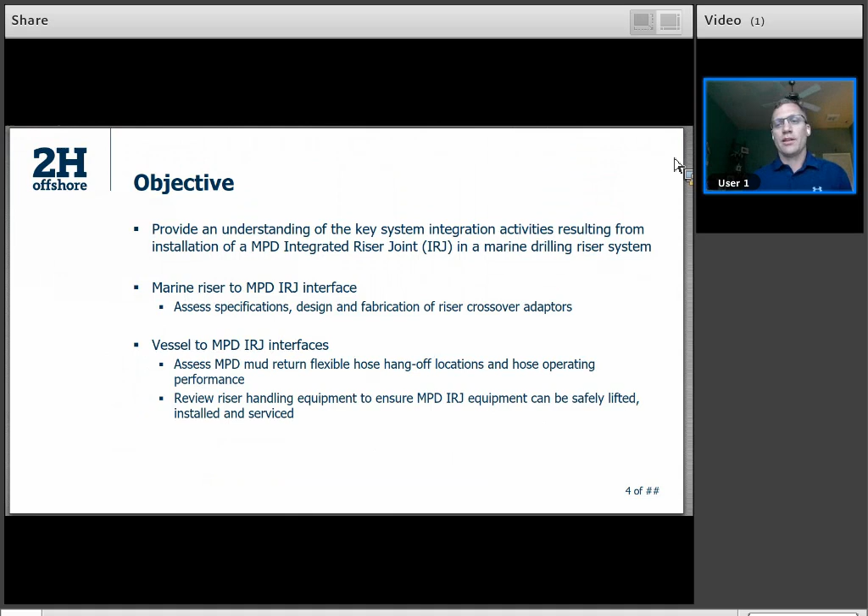Thank you, Victoria, for that warm introduction. I'm excited to be here today to pass on some of the key findings that we've had in MPD riser stack integration over the last few years. With that, we'll get going with the presentation.

We have about 30 minutes today, so MPD is quite a vast topic. We selected this topic today to give everybody a general understanding of the key system integration activities you want to consider when looking at integrating a managed pressure integrated riser joint, or IRJ, into a marine drilling riser system for an offshore drill ship or semi-submersible MODU.

The two key areas we want to focus on today are related to the two interfaces most commonly assessed first when putting an IRJ into a drill rig: the interface between the marine drilling riser itself and the IRJ. We'll go over the specifications, design, and fabrication considerations for developing riser crossover adapters.

The second half of the webinar is going to focus on the vessel to MPD IRJ interfaces. The two key areas we'll focus on there are placement of MPD flexible hoses in the moon pool, and how hose operating performance is affected by that placement.

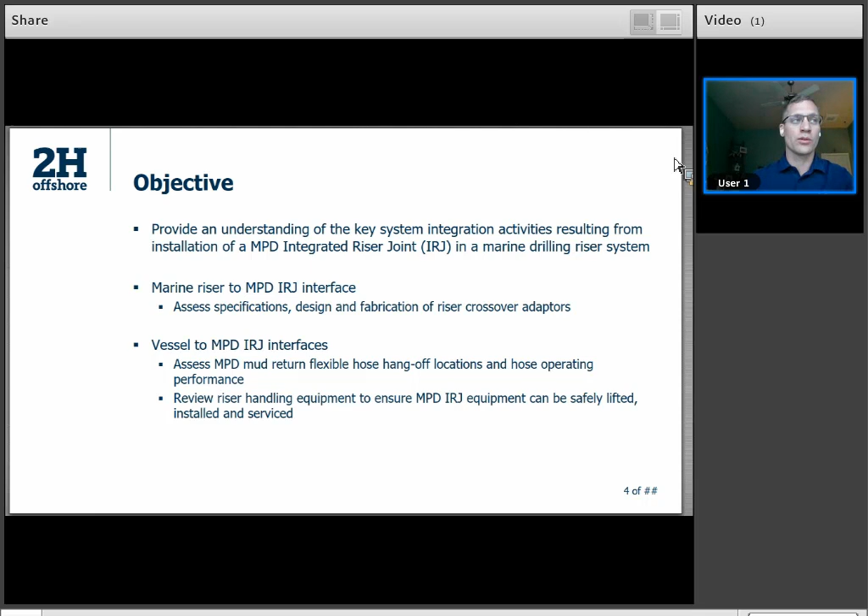We'll also review riser handling equipment, focusing on key areas you need to look into very early on in the project to make sure your IRJ equipment can be safely lifted, installed, and serviced effectively while on critical path during a drilling riser installation or retrieval.

Your typical MPD IRJ configuration, seen in most deepwater drilling activities today, requires a below tension ring managed pressure integrated riser joint placed just below the telescopic joint. It's often placed there because it minimizes the length of the flexible jumpers that have to be hung off the side of the drill rig's moon pool and below the hull all the way down to the IRJ.

We highlight this because for most drill ships and semi-subs, the flexible jumpers for choke and kill lines, the mud booster line, and hydraulic lines don't typically extend that far below the hull. But when you start looking at MPD IRJs, the hoses can extend to quite long lengths.

We've seen installations where you may have a keel joint, a termination joint, or even a pup joint placed below the telescopic joint and the IRJ. The keel joint and termination joint may be based on the rig-specific riser stack-up, but oftentimes drilling contractors look at putting a pup joint between the telescopic joint and the IRJ to get proper spacing, so that when the pup is hung off in the spider, the MPD IRJ is at an acceptable working height for any work platforms in the moon pool.

What these additional joints do is increase the length of your flexible jumpers that extend below the hull. We've seen instances where jumpers have ranged from 220 feet all the way down to 330 feet below the hull. That'll be key when we get to the second half of the presentation, looking at vessel to IRJ interfaces.

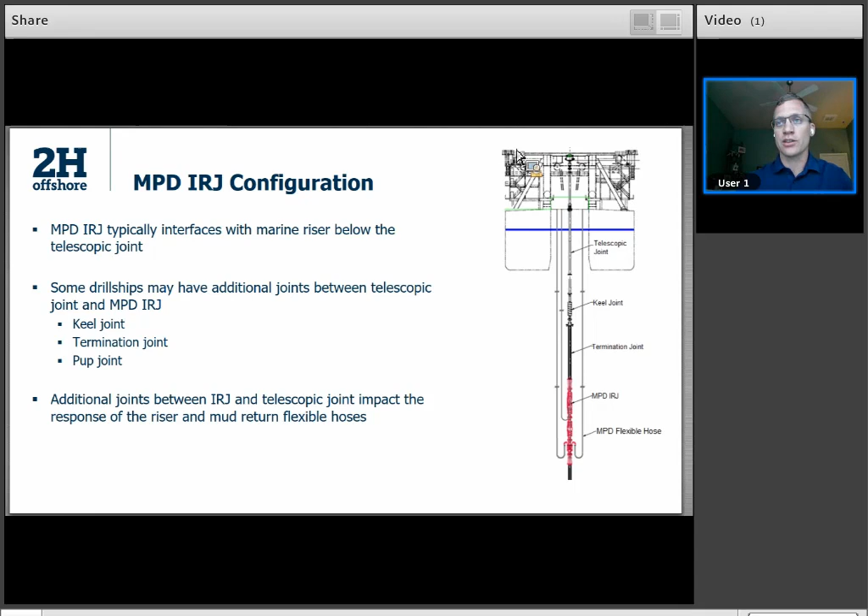So, excuse me, I bumped that a little too fast. The first topic we wanted to talk about was the marine riser interface to the MPD IRJ. One of the most common questions we get is why are marine riser crossover adapters required to put an MPD IRJ into the marine riser system?

They aren't always required, but typically the reason you'll need them is many MPD service providers have a standard set of flanges or interfaces at the very top and lower half of their integrated riser joint. Oftentimes those riser flanges could be API flanges, or custom marine drilling riser flanges specific to that MPD service provider's OEM kit.

What we need to do is have a way to adapt from the rig's existing marine riser flange and crossover to the MPD riser specific flange. So the crossover adapters are just the means to facilitate getting the connection so you can insert the IRJ seamlessly into the riser string, while still allowing the rig's choke and kill lines, mud boost line, and hydraulic auxiliary lines to have a continuous conduit through the MPD IRJ.

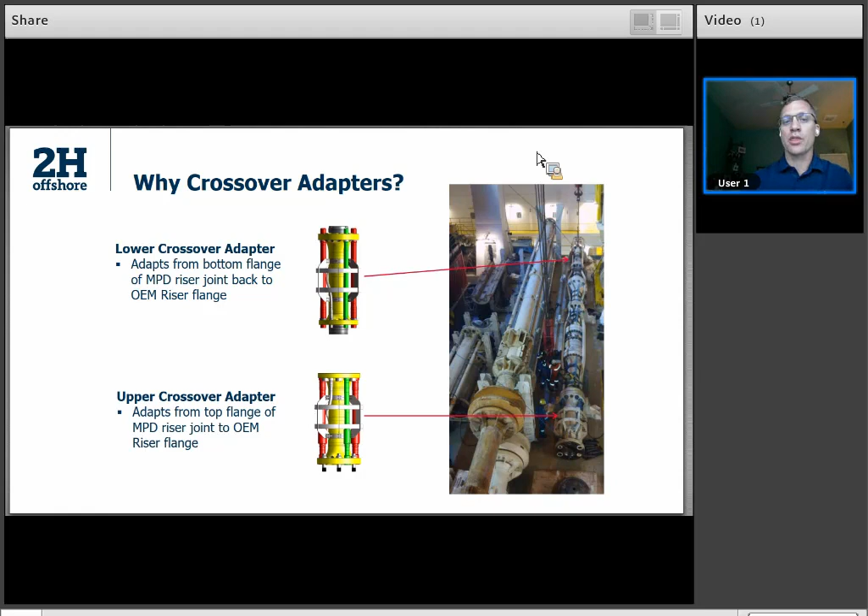The key crossover adapter design considerations you have to weigh: very early on, you're going to want a stakeholder management plan. What we mean by that is you have numerous players involved when you start looking at integrating an MPD riser system into your asset.

You'll typically have the operator, the drilling contractor, riser OEMs, your MPD service provider, and you may have third-party design representatives or even third-party certification authorities like ABS and DNV. Making sure all those parties come together and understand the roles, responsibilities, and requirements, and getting information to adequately design your crossover adapter from the drilling contractor and the riser OEM, is really beneficial in helping make sure you have a smooth execution when designing your crossovers.

Perhaps one of the key challenges to consider early on in your project is what type of riser system do you have? Typically today there are two riser system classifications out there: load sharing versus non-load sharing. On the next slide we'll define what that means. But that distinction can drive whether your crossover adapter design is fairly complex or fairly simple.

One aspect that crossover designs have to consider is managing the geometry changes that come with different orientations of your auxiliary lines. The lines may have different clocking positions between the MPD service provider IRJ and the existing marine riser.

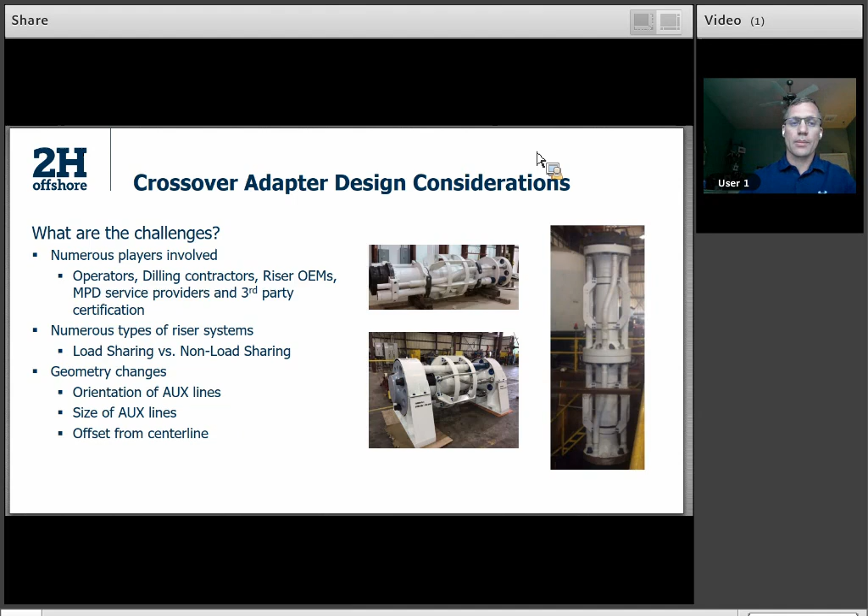Looking at load sharing versus non-load sharing, this can really start to impact the overall load rating of your MPD IRJ. There are two systems out there today. A load sharing system, one of the more common types of riser systems in the market, looks at the load path from the marine drilling riser down to the wellhead - typically with a load sharing riser, you take 70% of the tension load through the main tube, and split 30% of the tension load to the aux lines. That's trying to take benefit of the fact that the choke and kill lines, or the aux lines, are fairly rigid and strong structures, so you can balance the load between the main tube and the aux lines, which helps minimize the overall weight of the riser system.

There are also non-load sharing riser systems on the market where 100% of the load path is taken through the main tube only. The reason you may want a non-load sharing riser system is it creates less complex loading for the aux lines, and you just take the tension through the main tube of that riser.

Now, when we have to adapt the aux lines to deal with an offset difference between the IRJ and the marine drilling riser, the lines have to be bent outwards. As you bend these lines outward, you typically don't want to share load with those auxiliary lines, because anytime you put a bend into the aux line and put it under tension, the bend wants to straighten out. We've seen instances where people tried to take load sharing through bent aux lines in the past, and they met with challenges.

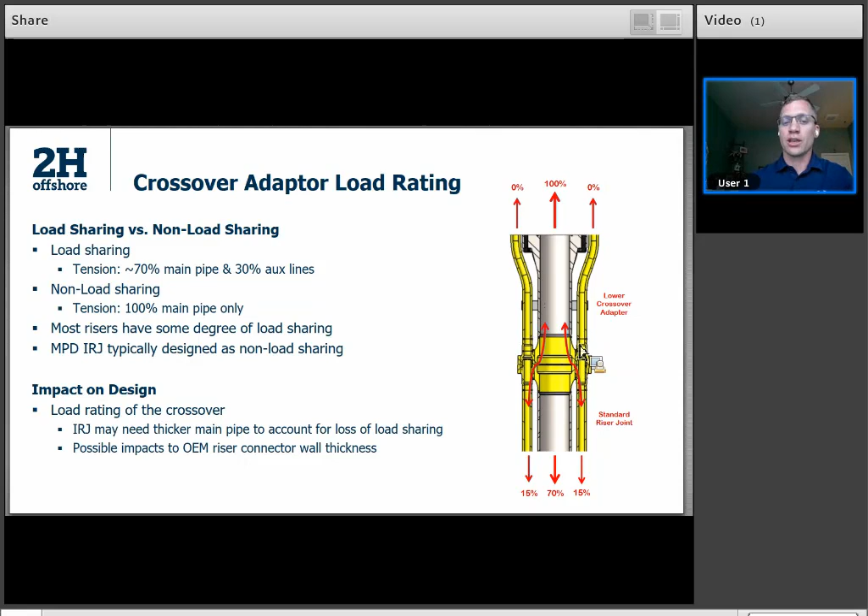So what that may require is getting in touch with the riser OEM to see if you can procure a flange specifically designed to transition from a load sharing to a non-load sharing riser, with that additional weld prep built into the flange. The reason we bring this up is that it could lead to a fairly long lead time.

The next aspect we get a lot of questions on relates to why we can't have a standard riser crossover joint for different riser systems. The reason is really highlighted in the pictures on this slide.

The lower left-hand figure is an MPD service provider specific flange with 5 auxiliary lines, which can be spaced equally around the riser flange in 60-degree clocking increments. For this specific installation, we looked at a MHWirth CLIP style riser connector with 4 aux lines, run 180 degrees on opposite sides of the riser, in parallel. So you can see the crossover adapters have to deal with different clocking positions.

The offsets from center line relative to the bolt circle were different, and the quantity of aux lines was different. So even within common OEM riser flanges, if you look at the figures to the right for a Load King 3.5 riser system, the way we've set these up is that for all these riser flanges, the choke and kill lines are in red, with the red dots oriented north and south. That gives you an idea of where the riser boost line, riser hydraulic lines, and any additional aux lines would be placed.

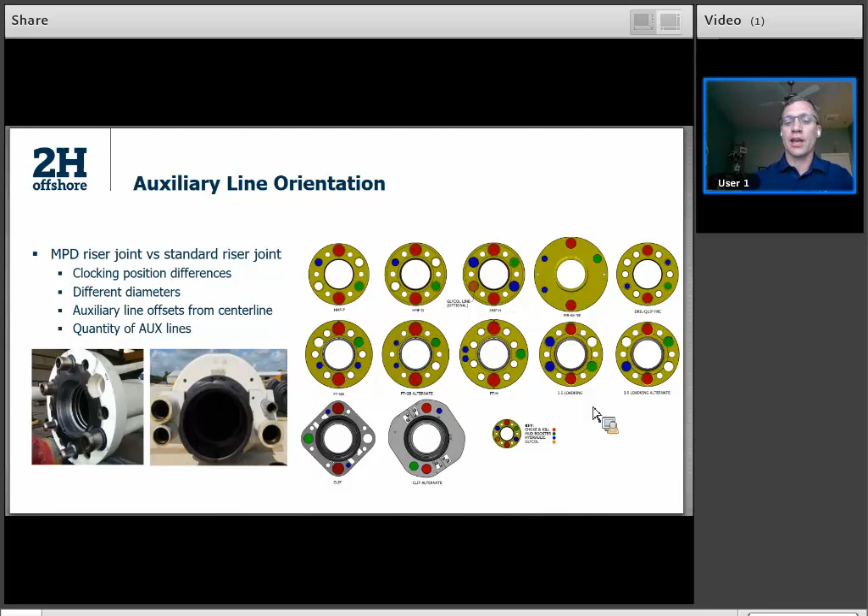So if you have a rig that potentially has that glycol line, you'd want to get conversations going with the MPD service provider fairly early on. That way you can identify the need of any changes you need to make either to the riser system, determine if that glycol line is needed, or possibly look at seeing if it is feasible to integrate that 6th aux line through the IRJ.

Going back to what we talked about with different clocking positions, this was the specific set of crossovers we developed to allow us to interface from that MPD service provider's flange over to a clip riser system. You can see we have the 4 aux lines running in parallel, and we had to bend lines out of plane to adjust for that orientation.

The challenge that creates is you get mild to severe bends when you're trying to clock between 60, even up to 90 to 100 degrees out of plane with aux lines. And what that does is create the perfect conditions for buckling.

The way we try to arrest buckling is we try to minimize the severity of the bends to the greatest degree possible, taking that over a longer length and making the riser adapters longer themselves. But the challenge there is as you add length to the riser crossover adapters, you're adding weight to them, and you may have to procure additional raw materials in order to get that length.

Oftentimes we're going to increase the wall thickness to try to make those lines stiffer, and oftentimes you're going to have to increase the wall thickness anyway, because you're taking such a severe bend that the line will thin out near the bends. A lot of the time you'd think you'd be able to reuse the existing aux line material from the provided donor joint. However, because of the wall thinning from bending, you're likely going to have to procure thicker aux lines in order for those lines to be bent.

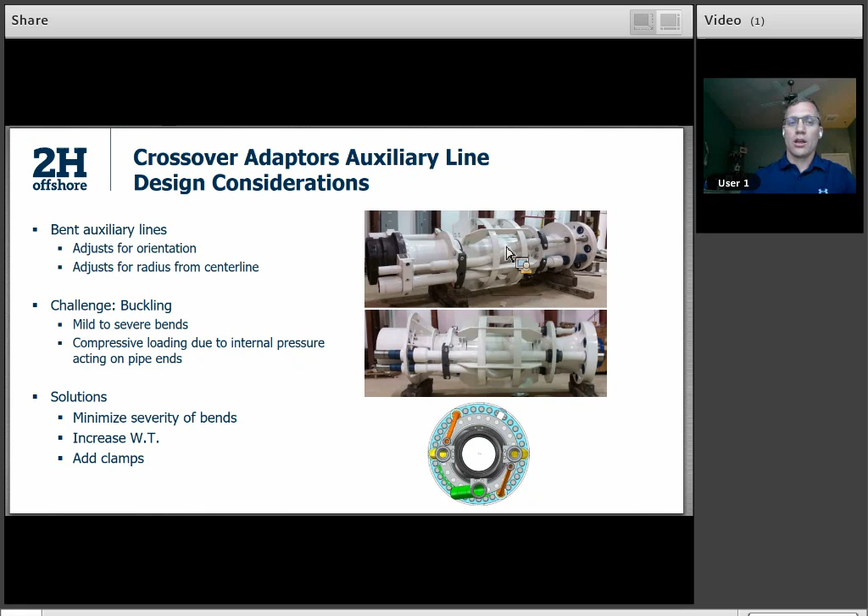Another challenge you can see in dealing with the aux lines is oftentimes you could get to a condition where you may have different internal diameters between the existing riser connector you're interfacing with and the MPD service provider's auxiliary lines. In this example, the hydraulic line had a smaller ID, and we're using this as an example, but for one specific case we had to adapt from a 2-inch ID over to closer to a 4-inch ID on the hydraulic line.

And when you applied an internal pressure of 5,000 psi, that created a load imbalance due to the line size change and the piston area inside the aux lines. So that's going to increase the compressive and torsional loads on those lines, and to some point you have to be able to restrain that.

This can become quite challenging for non-load sharing riser systems, because the riser connector itself isn't designed to take any of the load from the aux lines. So if you're dealing with a non-load sharing riser system, the way to restrain that net axial load is to put that load into a clamp. You wouldn't want to put that load into the OEM riser connector, because that may take it out of its API 16F or ABS and DNV certification rating.

Any additional load you put into the riser connector may require more detailed analysis, or may require you to beef up the riser connector and speak to the riser OEM. So that's just something to be aware of: if you're looking at a non-load sharing riser system, they can be more challenging to manage the aux line bends and pressure load imbalances.

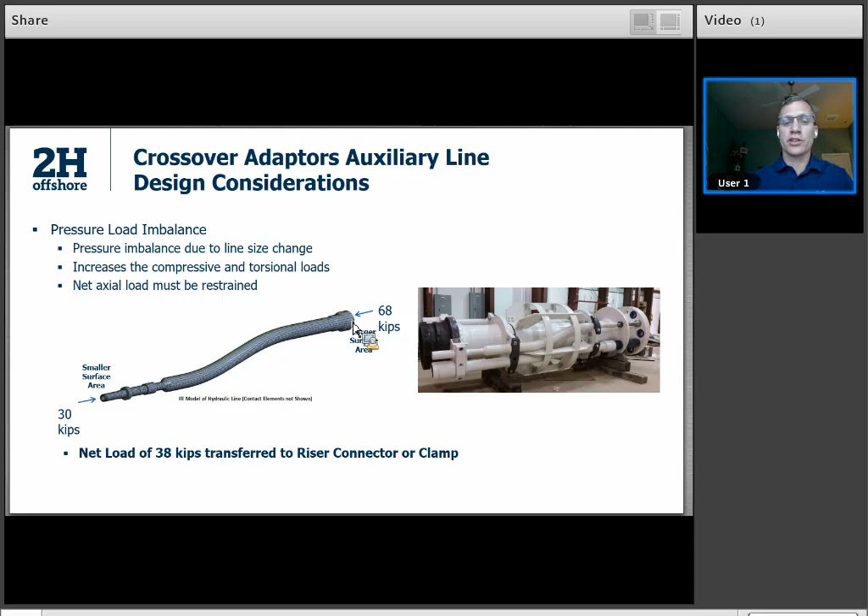There are design features you can incorporate to manage those, but it may increase your overall lead time for those riser connectors. The reason we wanted to highlight crossover adapter design and delivery timeframes is that the crossover adapters themselves are usually the last items ordered over the course of your MPD system integration into the rig. Typically, the design and delivery is on critical path. They're usually not thought of early on when the rig survey is performed to start incorporating the MPD IRJ as well as the rest of the MPD equipment.

What we've seen to date is your design and delivery schedule can range from about 12 to 20 weeks, with a 16-week delivery on average. Flanged riser crossovers are typically load sharing and have less design complexity. When you have a load sharing riser connector, you may have a delivery time of 10 to 12 weeks, depending on if you've looked at that riser system in the past.

From our experience with the crossovers we talked about on the previous slide, the very first set of crossovers that were designed and developed by us for a non-load sharing riser system had an overall total fabrication time turnkey of about 21 weeks. It took 11 weeks to complete design, with some overlap in fabrication of 14 weeks.

As the designs mature and you get more tools in your kit and start working with more types of riser connectors, you have more tools to more rapidly complete your design. And you'd have fabrication drawings that are fairly more complete and don't require as many updates. That can allow us to get a lead time down to, say, 10 weeks for the BHP Invictus MPD riser crossover adapter. That was a Load King riser connector design. It was load sharing, so we didn't have to look at incorporating any clamps.

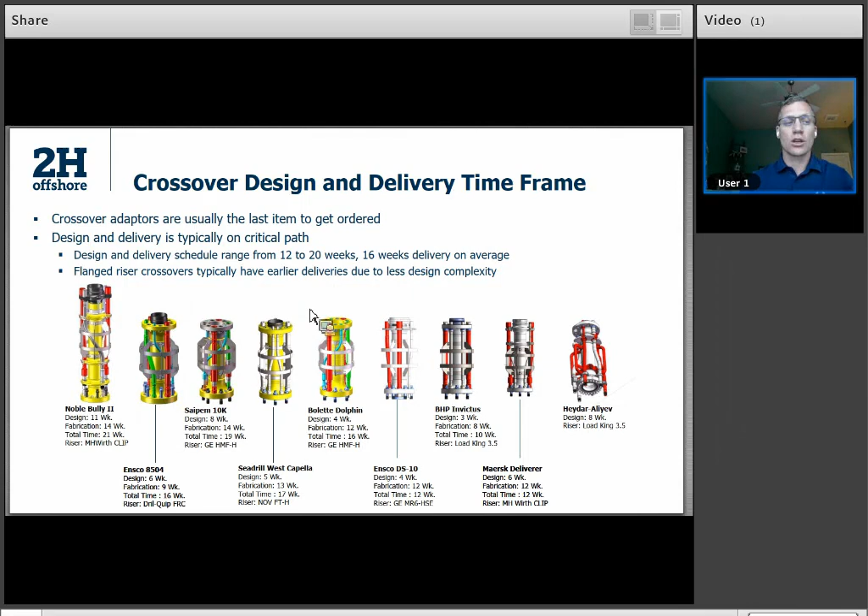We'll continue forward here, and the next half of the presentation is vessel to MPD IRJ interfaces. We're going to be moving away from the crossovers into other areas we commonly work in, and those are related to MPD mud return flexible jumper hose assessments.

Very early on in MPD operations, and even with rig choke and kill, mud boost, and hydraulic lines, there aren't really many analyses out there that tell you what conditions you can safely operate the hoses in to make sure you don't violate the hose minimum bend radius, and to make sure you don't have clashing with the hoses and adjacent structures or the hoses themselves. We want to make sure any hose design limits related to tension capacity and hose twist aren't violated, and we also want to understand how much weather vaning the rig can tolerate with respect to weather heading between the vessel and the marine riser system.

These studies can be performed to establish hose hang-off locations that give you an acceptable operability window to perform MPD operations for the hoses, or we can optimize and look at alternate hose hang-off locations that may give you a wider range of operability conditions you can cover. These hose studies are required for ABS and DNV certification.

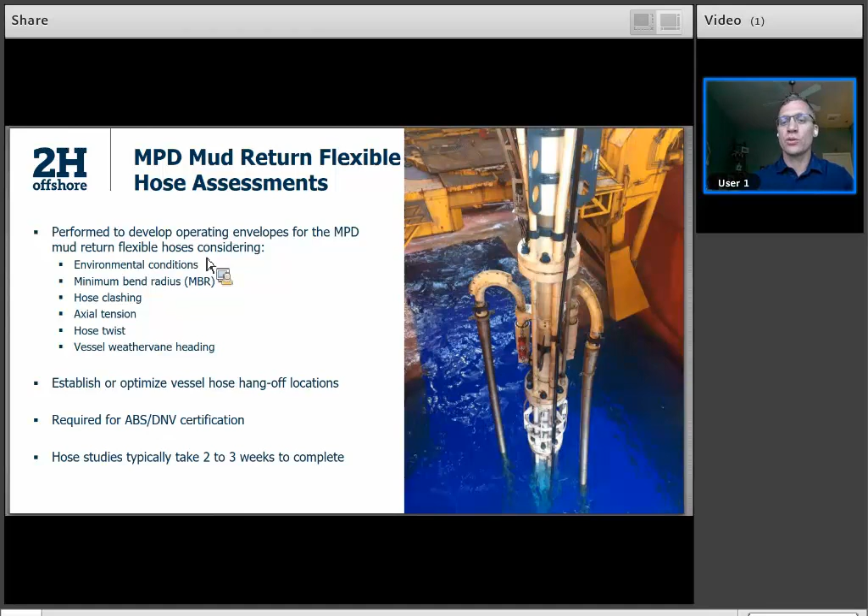If you are looking at a specific drill rig that has ABS CDS or DNV OS E101 ratings, and you would like to maintain that certification from that particular authority, they do expect the hose analysis to be performed. The hose studies themselves typically don't have that long of a lead time. On average, once the input data is received, they take about 2 to 3 weeks to complete, so there's a fairly rapid turnaround.

As mentioned on the previous slide, we wanted to highlight how we at 2H came up with operability envelopes in order to graphically represent what conditions you can safely operate these hoses in. What we do is create separate operabilities for each MPD jumper that's installed, typically at least 2 6-inch MPD mud return lines. You may have a bleed line or a lubricator line for servicing the RCD as well.

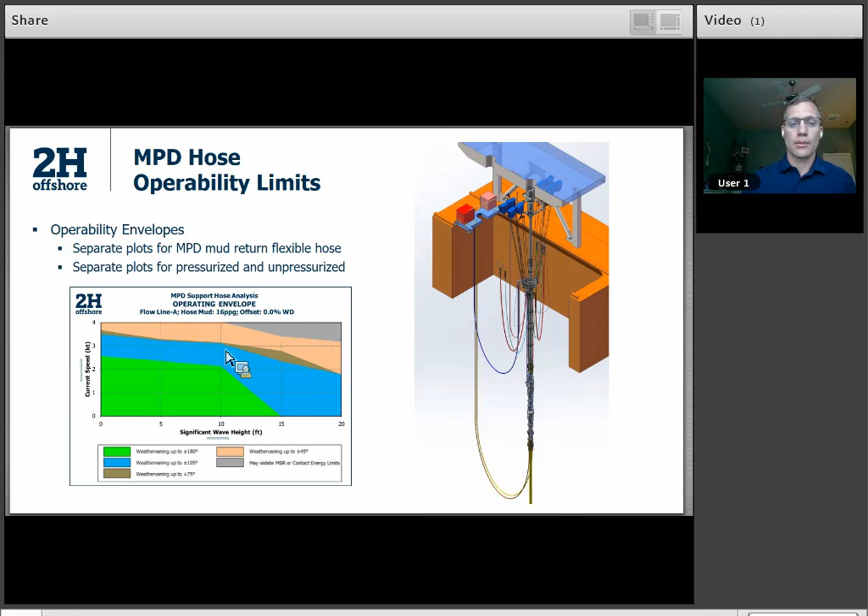You just have so much wave energy and current pushing against the hoses that they're going to want to develop a kink point between the hose and the rigid hard piping they're attached to on the rig itself.

You also have what we see as clashing. Anytime you have the jumpers placed very close together, you can get clashing in the sag bend region or the midspan of the hoses, where the hoses clash with themselves. That typically isn't that big of a concern, but some installations require the installation of 2 flexible jumpers to make up a complete length of, say, 220 feet.

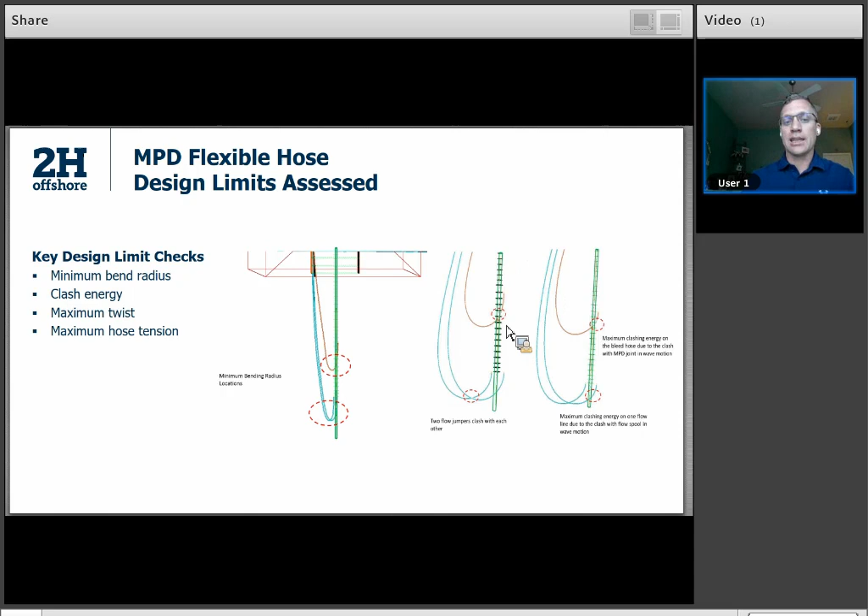So our key findings to date, when we start looking at the hose hang-off locations, is that the most significant impact we see on the performance of the hose is the placement of the hoses in the moon pool with respect to the marine riser and the IRJ itself. If the hang-offs are placed too close to the riser or too close to each other, you're often most likely to see MBR violations, which can limit the allowable weather vaning.

Anytime the rig is going to weather vane, the hose is going to want to wrap around the riser. So as the vessel turns clockwise or counterclockwise, that hose wraps around it. In most cases, the outer diameter of the riser has a smaller radius than the minimum bend radius of the hose. So if you look at very large weather vane heading changes past 90 to 105 degrees, the hose is going to want to wrap around the riser, and at that point you've created a point where the hose conforms to the outer diameter of the riser, which may already be below the minimum bend radius of the hose.

So in order to optimize your performance, you would want to look at placement of the hoses to give more clearance with the hose and the IRJ itself, preventing it from wanting to wrap around the riser to the greatest extent possible, to improve your weather vane heading changes.

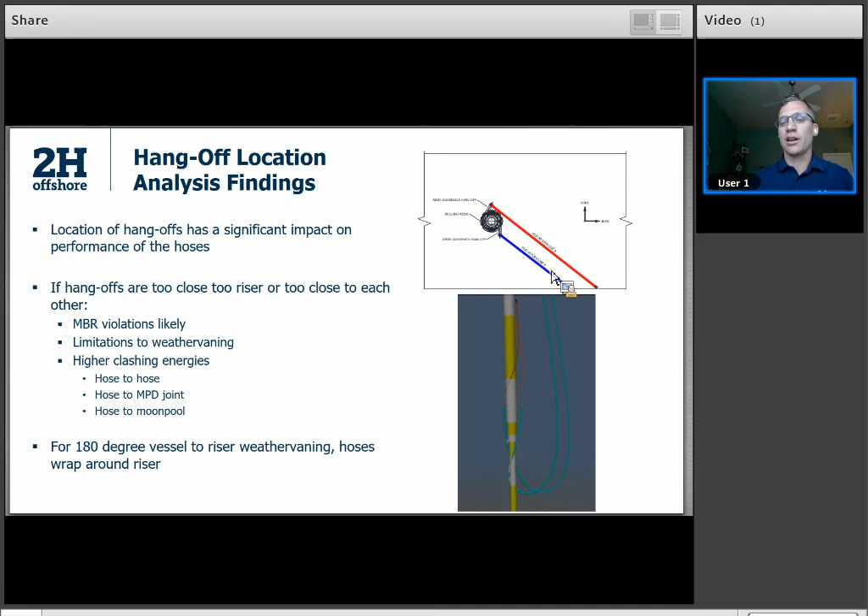In this example, going along with what we looked at in the previous slide, when we worked with this particular drilling contractor to give them the greatest operability window they could have, we looked at alternate locations for that red jumper, which originally was on the starboard side, just forward of the blue flexible jumper. We looked at multiple iterations to try to improve the operability performance of the hose. But ultimately, for this specific installation we had to move the red jumper to the port side of the moon pool to give us the greatest operability envelope possible.

And what that did is reduce the likelihood of the hose wanting to wrap around the riser, and it also reduced contact between the hose and the riser, as well as between the two hoses, reducing the likelihood of abrasion.

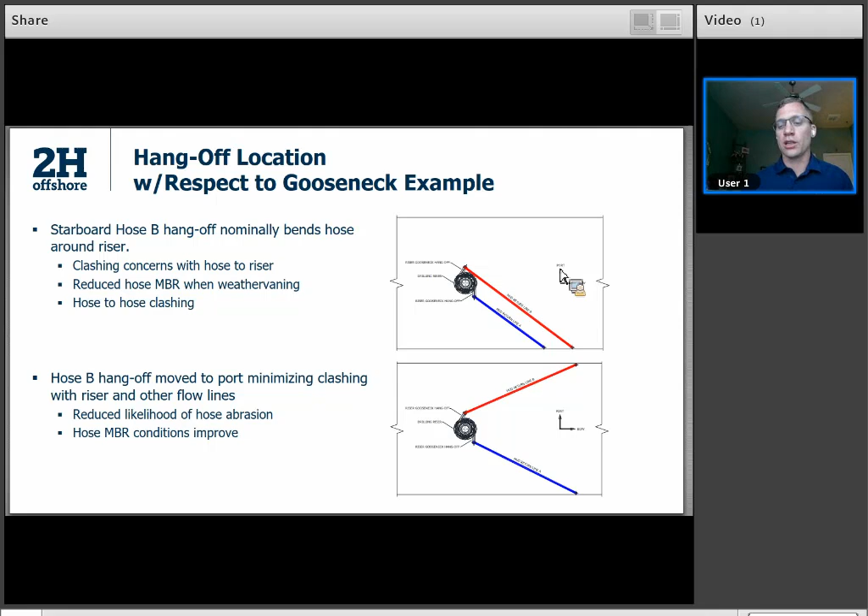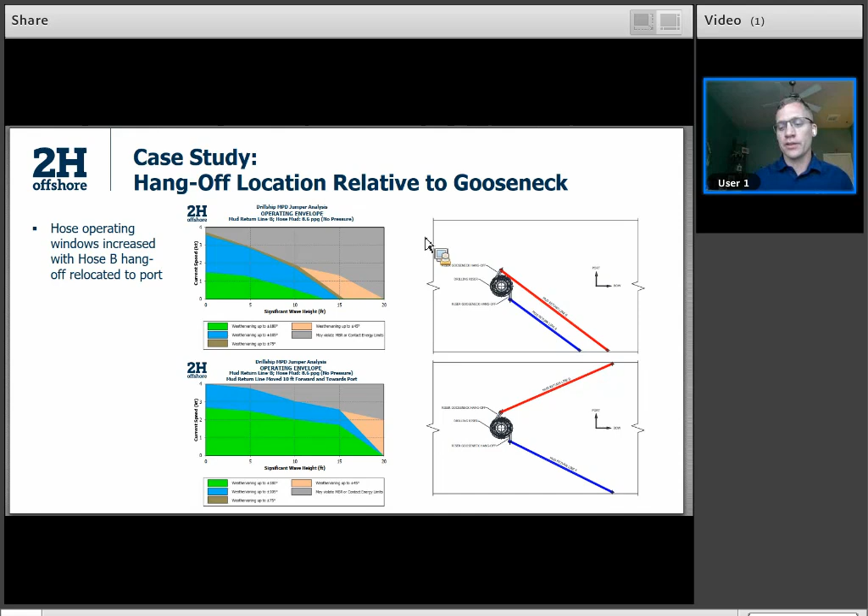The other really key factor we wanted to highlight that we see today is that hose design stiffness has the most significant impact on hose performance. The way these hoses are constructed, they're typically bonded flexible jumpers, and as pressure is applied to the ID, the hose gets stiffer. And as the hose gets stiffer, it's going to want to deflect less as current and wave loads impact it, or from dynamic motions of the vessel.

But the reason we wanted to highlight this is when the MPD IRJ is installed, you may not always be drilling with MPD. So when the hoses are unpressurized, you still have to make sure the minimum bend radius isn't violated and you don't violate the design constraints of the hose, because these hoses are quite costly to replace if they were to be damaged. So if you look at an MPD flexible jumper study, make sure you're always considering the zero pressure case, as that would ultimately be what drives the operability window for the rig.

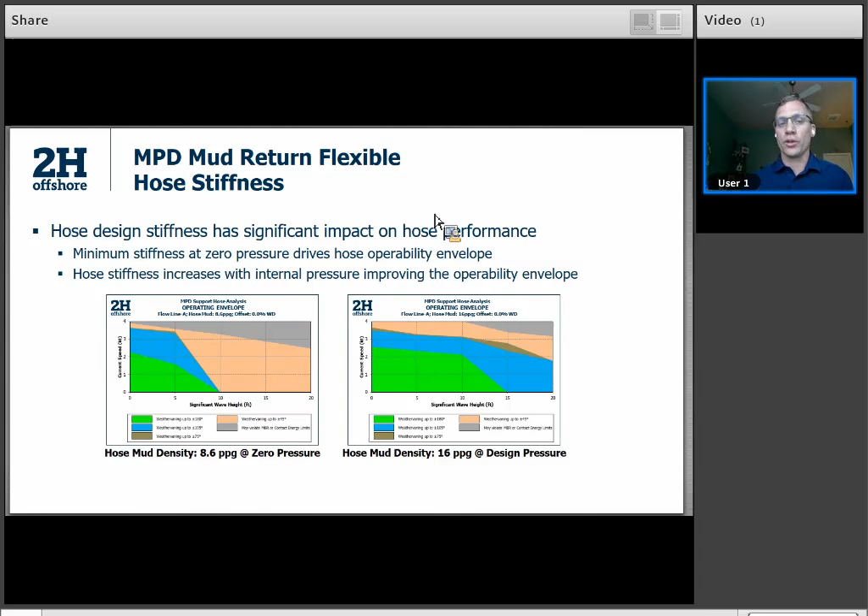Damage to the jumpers is a real concern, and we've actually seen a fairly good correlation between what our analysis models are showing and where we'd expect to have abrasion.

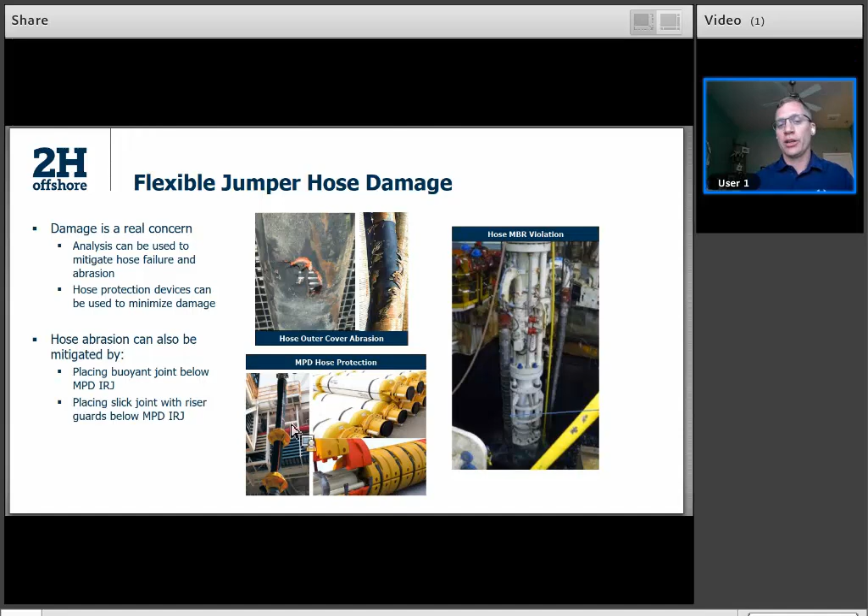The best way to try to mitigate abrasion would be to either look at putting hose protection devices in place, which are these flying saucers here, and MPD hose protections. You can also look at placing a simple fix, which would be a buoyant joint below the MPD IRJ. What the buoyant joint would do is prevent the hose from contacting any sharp objects, aux line clamps, on the riser joint immediately below the IRJ. Some rigs actually have riser protection or riser guards on slick joints below the IRJ. So there are a couple different tools you can put into play here, but we do see damage to these hoses, and it can be mitigated.

Moving on to other aspects to consider when performing a rig integration study for the IRJ into the drill rig: you want to look at what your minimum pass-through IDs are and what the rig's riser handling equipment is rated to. The reason we bring this up is the IRJs can be over 100 feet long and can weigh well over 100,000 pounds, depending on which generation and what service provider you're working with for installation of the IRJ.

Your pass-through ID, there are typically two areas you want to focus on. One would be the pass-through ID of the IRJ itself through the rotary and the diverter. Most rigs out there with a 60-inch diverter are going to have a minimum pass-through ID of 59 inches. But there are also rigs that have wireline tension systems with a tension ring stowed below the diverter housing that may have a pass-through ID smaller than the ID of the diverter. So anywhere the IRJ is going to pass through, you're going to want a good solid understanding of what those IDs and restrictions are going to be.

Another item to consider is that once the IRJ is installed, you're typically going to have some type of RCD or bearing cartridge that has to be run on the drill pipe through the diverter, through the flex joint, through any spacer joints, as well as the telescopic joint ID, to make sure it can successfully drift the RCD bearing. We've seen examples where one OEM service provider had a 19-inch bearing that needed a 19.1-inch drift ID.

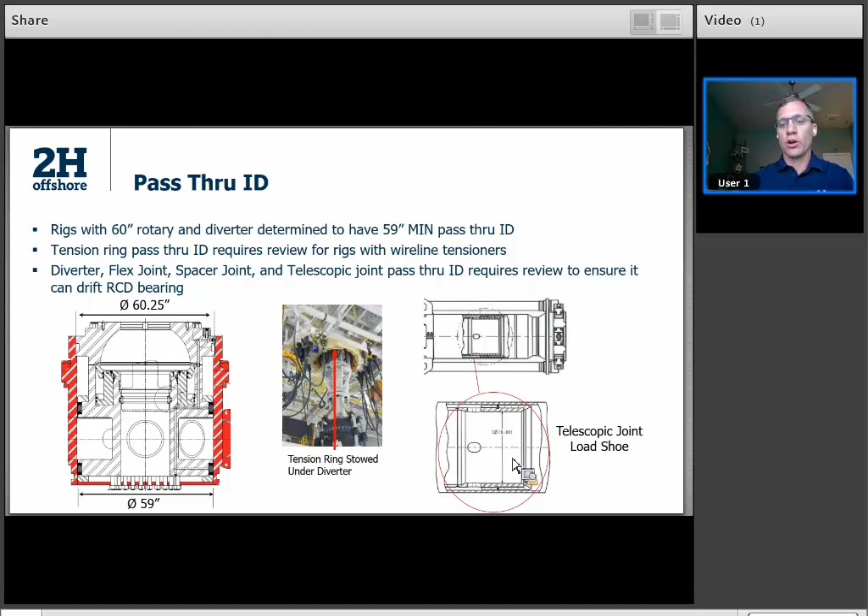Well, the base of the telescopic joint had a 19-inch pass-through ID in the load shoe. And while this may look like a stopping point for the project, oftentimes you can work with the OEM of the telescopic joint to try to make modifications, possibly turning down the ID of the load shoe to accommodate that bearing. It may be limited based on the load shoe and the telescopic joint, or possibly the blat tool. But if you look at it early on and start discussions with the OEM of the telescopic joint, you may actually be able to machine down that ID.

Other areas are related to handling. You want to make sure the rig cranes have sufficient capacity to handle the joint, and have adequate reach and capacity to place the IRJ on the catwalk or any areas where we're going to be storing the IRJ.

Riser gantry cranes, typically used to handle buoyant joints, won't have the length or weight capacity to store the IRJ, so they may rule out the use of the gantry crane. That's why we wanted to highlight that you do want to have a good study to make sure the rig's cranes are able to pick up the IRJ.

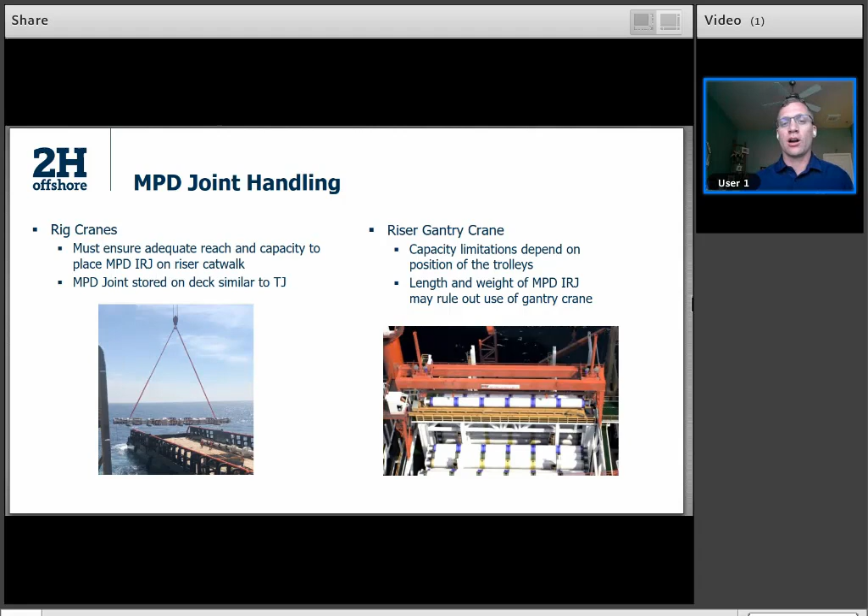The other three areas you're going to want to check from a handling perspective are the catwalk systems. You want to make sure you check the capacity of the skates. When you look at the riser catwalk, the forward skate usually has more capacity than the aft skate.

What's good to know here is that if you have a catwalk capacity that might have a lower rating than the weight of the IRJ itself, you can typically achieve upgrades fairly easily in order to handle the IRJ, but you'd want to plan for that earlier on versus finding that out later in the project, because there can be a lead time associated with getting those upgrades made.

The other thing you're going to want to look at is the capacity of the riser tailing arm. You may have to have protection on the IRJ to prevent the tailing arm from damaging any delicate IRJ components, such as valve bodies or hydraulic lines.

You also want to make sure that the tailing arm has sufficient capacity to be able to transition the IRJ from horizontal to vertical over well center.

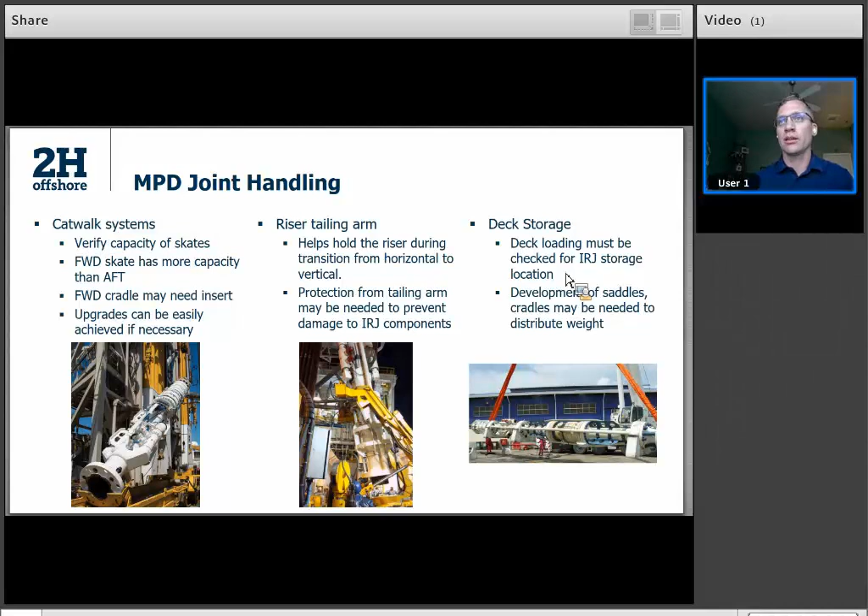As mentioned earlier, typically the IRJs are going to weigh a bit more than the rig's standard telescopic joint, and with that in mind, your riser setback area is most likely sized to store your telescopic joint. So in looking at deck storage constraints, you may have to look at placing saddles or cradles along the length of the IRJ to distribute that heavy load from a point area to a larger area to manage your deck loading requirements.

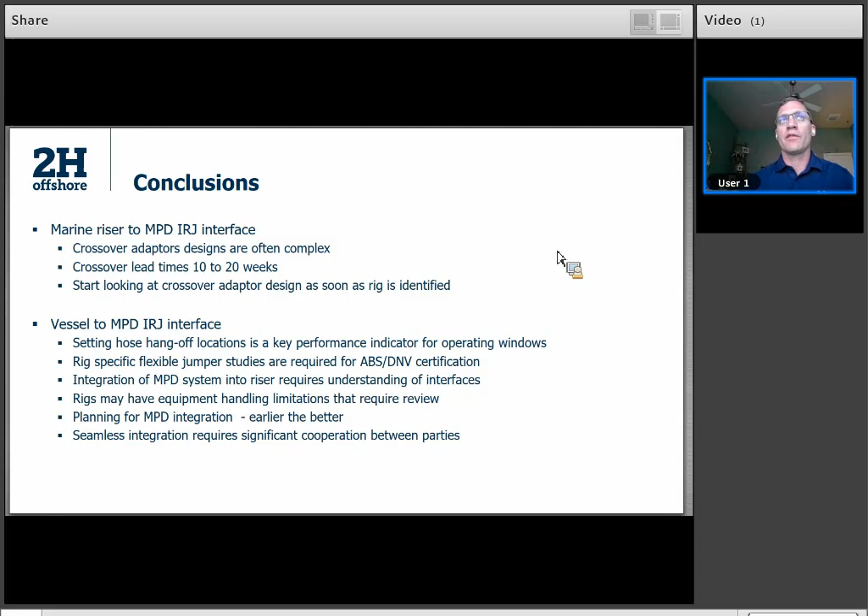If you can plan early on for the handling equipment limitations that require review, you may be able to work with OEM providers to get upgrades for that equipment so you can have seamless integration and cooperation between all parties very early on in the project, and that would hopefully allow you to have a more speedy and efficient installation.